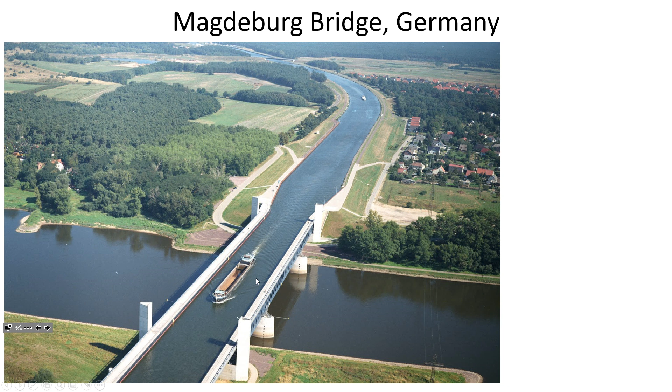But nevertheless, I thought it was a really good question to consider the proximity of residents to this and just kind of wonder, is there a risk there? And there's other risks there. It's not necessarily stormwater flooding risks, but the earth can always do unexpected things, and there could be spillage from there into it, but I don't think that flooding itself is going to be a problem. So that was a good question. I welcome thought-provoking questions like that.

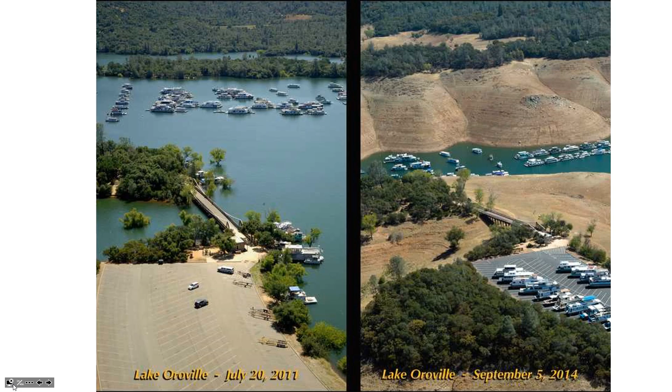But so I mentioned that reservoir is full now because of all the rain that they'd been receiving in Northern California. And I verified that that's true. Yeah, the reservoir is full, but I didn't realize quite the scale of it. It's really interesting how much that reservoir has filled up. Now this is a prior time that it went through that cycle of relatively wet conditions in 2011, which is about when I went and saw it, to a few years later.

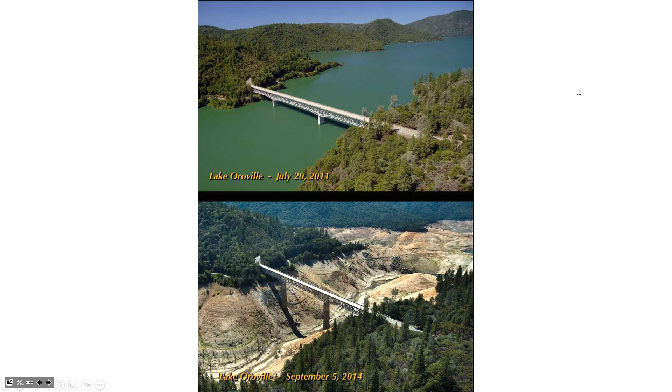If you look, the same basic location, here's the parking lot, here's this little floating bridge, and obviously the water levels are a lot lower in 2014, and they stayed low until recently. So just a couple of pictures that illustrates the difference between when this reservoir has water in it and when the water levels are relatively low.

Let me dim the lights so that it's easier to see these pictures, because there's a few interesting ones here. Try not to fall asleep with these lights down. I know it's just after lunch, but

Obviously when the reservoir doesn't have any water, it's not able to provide any hydropower benefits, and this reservoir does have a pretty significant hydropower generation capacity. But it is able to provide flood protection, which is another purpose of this reservoir. There are a lot of communities downstream that historically would have been threatened by wide fluctuations in the river levels, and so they can trap water and let it out at a more moderated flow rate and provide flood protection.

And so, when the water level is down like this, I guess if we're trying to be optimists, we could say, well, at least it's got plenty of flood protection available, because they could trap a lot of water when the levels are that low.

Now, consider this, just one more picture. As recently as the day after Christmas, the water level in the reservoir was 673 feet. That's the elevation of the water above sea level. That's not how deep the water was in the reservoir. That's just the water level was at 673 feet above sea level.

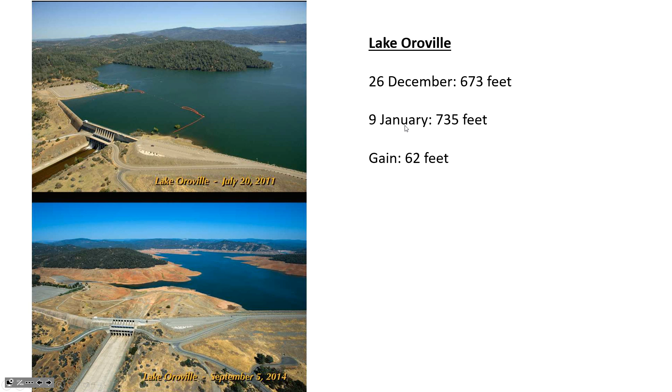And then January 9th, which was that Monday, 2 days ago, it was at 735. So just in a couple of weeks, the water level went up 62 feet. That's just incredible considering the surface area. We're not talking about a swimming pool that fills up quickly. We're talking about millions of acre feet of reservoir that went from almost empty to almost full. So that just kind of puts in perspective how rainy it's been in Northern California recently.

So this is the dam that is at the end of Oroville Lake. It's a really interesting dam because it's the tallest in the United States, but yet it's an earthen dam. And you'd think maybe for such a tall dam, 770 feet from top to bottom, maybe they'd need concrete, but apparently not. They can do a lot with just an earthen dam, and behind it is the second largest man-made lake in California, 3.5 million acre feet.

And that's maybe not a unit that you're familiar with, acre feet. It is what it sounds like. Acres is a unit of area. So if you had 1 foot of water that covered an area of an acre, that's 1 acre foot. So an acre is pretty big, right? This dam holds back a reservoir that has a capacity of 3.5 million acre feet. So it's a lot of water is the point.

Now, it's interesting. The water can get out of this reservoir 3 different ways. The water can go through the power plant, and 16,960 CFS can go through the power plant at any given time. There is a river bypass that allows for fish migration, and that's a relatively lower flow rate, 5,400 CFS.

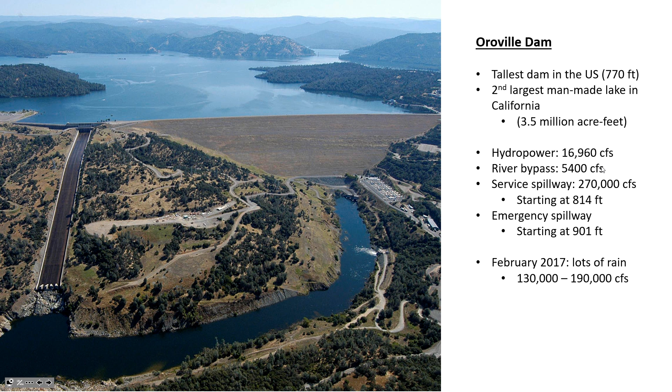So obviously, if that much is coming in, either the water level is rising or they're having to send water down the service spillway, because the hydropower and the river bypass combined isn't going to be able to discharge this much water. So that's exactly what happened. There was so much water coming in, the reservoir filled very quickly, they're sending as much as they can through the hydropower and river bypass, and so now water has to go down the spillway. So what could happen, right?

Well, ordinarily, water goes down that spillway at quite a high velocity. 700 plus feet is the vertical distance that the water has to spill off. There's a lot of energy that gets picked up by water as it's accelerating down the face of a concrete spillway. They've got these big weirs at the end of the spillway to dissipate energy, to take the impact and the brunt of the water so it doesn't totally scour the river downstream.

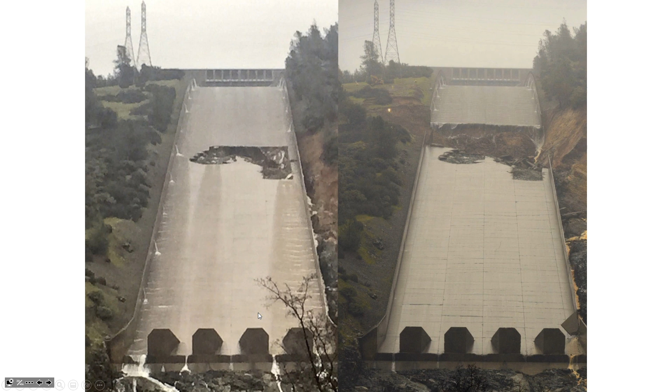And what they noticed was there was a little bit of a problem, that a variety of factors caused a crack in the concrete. The factors are that, number one, they didn't inspect it probably as often as they should. Number two, it was a bit old to begin with. There were probably some construction problems. The rock underneath is weak.

And so this event happens where they're having to send a lot of water down the spillway. A hole forms, so they turn off the water briefly just to get in there and have a look. But they can't turn the spillway off for very long because the water level's rising. There's still water coming into the reservoir. They can't stop that. So they have to turn the spillway back on again. The hole gets bigger.

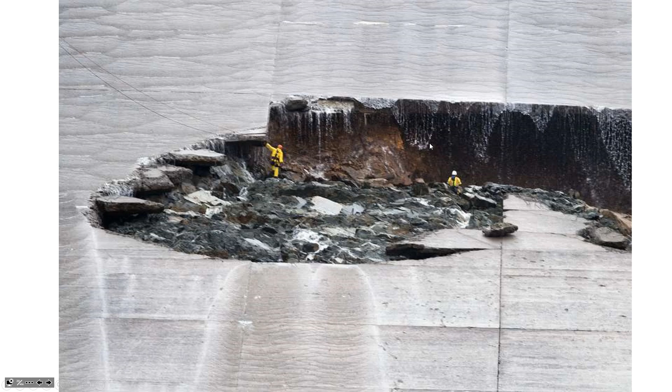And just to give you an idea of how big that hole was, you can see for perspective here, it got up to 300 feet in diameter during one of the periods where they turned off the water and sent people down to have a look. So 300 feet, that's a big hole in the spillway.

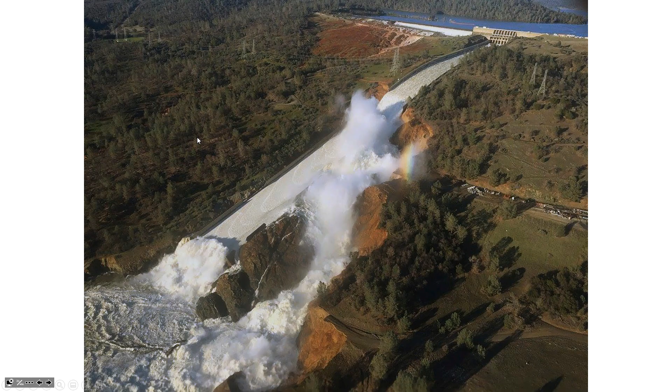And you can see that, compared to the size of the hole, the thickness of the concrete just seems wafer thin, very thin concrete. I'm sure at the time it seemed adequate, but what happened was the condition continued to deteriorate, and water was flowing down the side, and that's bad because it was headed in the direction of the dam, all this scour.

So people were wondering, is this dam going to be threatened? If this whole hillside erodes and collapses, is the dam going to be stable? And they thought probably the dam will be stable. But probably isn't good enough when you've got 180,000 people living downstream of the dam.

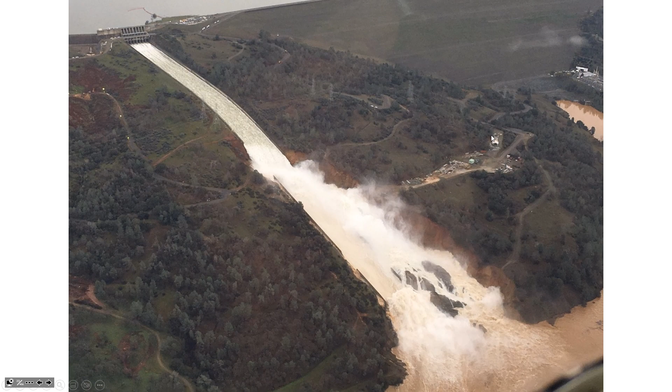And so they evacuated 180,000 people, in part because maybe this hillside will fail, but the other issue was that the spillway couldn't handle as much flow as they wanted. They turned the flow down a bit out of the spillway, still sending some water, but they knew if they turned it all on, it was going to cause irreparable damage.

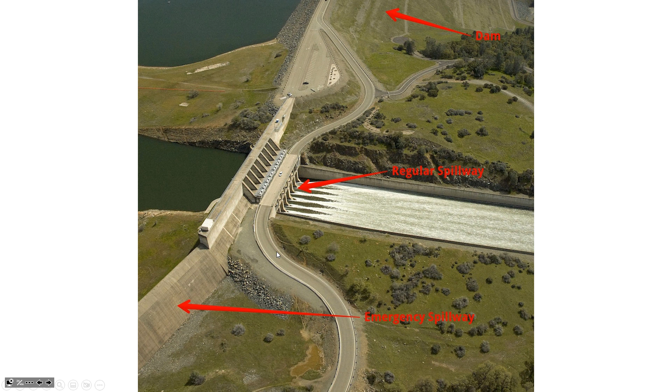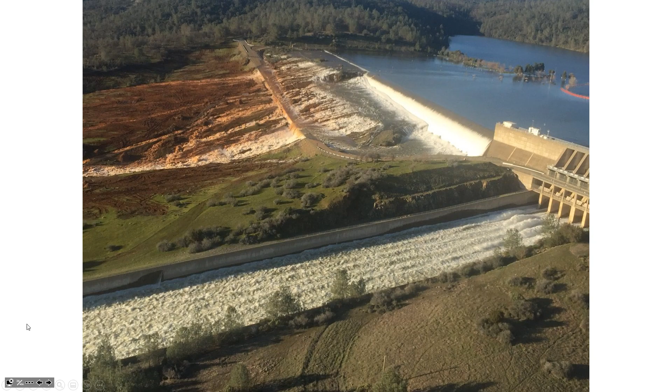So they turned down the flow to the spillway a little bit, and they're sending water over the emergency spillway, which had never been used before. First time in the history of this dam that the emergency spillway had water go down the front of it. And the hillside is not concrete, it's just vegetation and soil. And so you can see the scale of the destruction.

They had a few hours notice, so they sent guys with chainsaws onto that hillside to cut down trees as quick as possible, because they knew the water would do it, and then those trees would go downstream and clog things up. So they tried as much as possible to clear the area of debris and obstacles. But you can tell from the color of the water, a deep, rich, dark brown, that it's taking a lot of sediment with it.

So they turned on this emergency spillway. There's still water going down the service spillway. The water levels are continuing to rise, and the toe of this emergency spillway starts to scour and erode. And so they're thinking, if there's a total uncontrolled release of water from the reservoir, then those 180,000 people downstream are in real trouble.

So ultimately, they evacuated them because they were worried about the emergency spillway completely dematerializing and all of the flow coming out of the reservoir in a catastrophic and unregulated way. So Oroville Dam has a real sordid history. They have repaired it since this 2017 event, but this gives you an idea of the path the water was taking through the emergency spillway as it worked its way downstream.

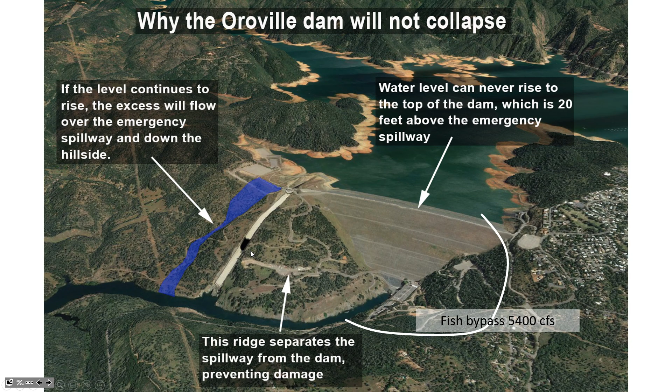And here you can see the size and scope of that hole. This is vertical exaggeration, so you can sense the path the water was taking and how it was guided by the contours of the land. There was a pretty substantial hillside between the spillway and the dam, but they didn't want to take chances because so many unexpected things had happened already, so they displaced those 180,000 people.

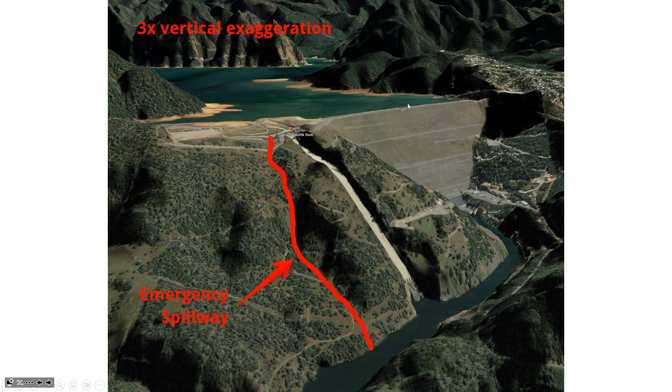So you can see here, looking downstream, the emergency spillway water making its way into the river, and all that sediment turns out not so good for the environment. Really tough for fish and other aquatic species to recover from that much soil getting into a river. It interferes with habitat. Big quantities of sand settle out of suspension at slow parts of the river, so now they've got gigantic sandbars and sediment in places it wasn't previously.

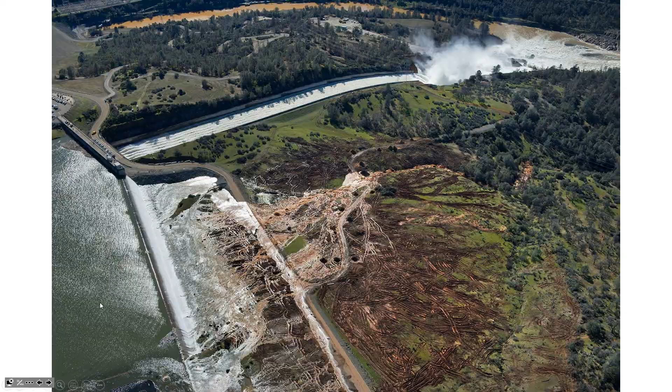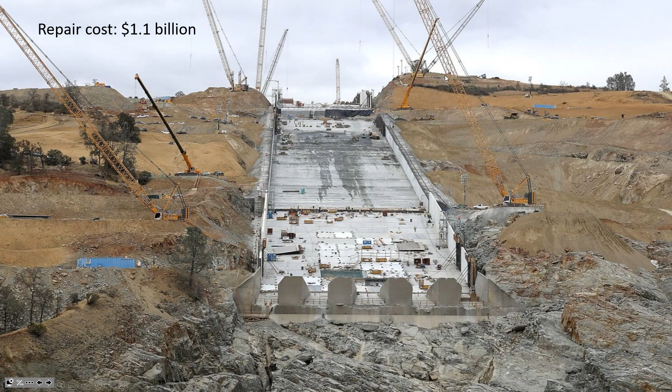So the area was pretty devastated after the fact. You can see that most of the spillway was damaged, and a lot of the rock to the side of the spillway was damaged. You may wonder, how much does it cost to recover from something like that? $1.1 billion, it turns out. $1.1 billion.

And the thing that's a little hard to swallow is that this whole incident wasn't a real surprise. Back in 2005, when this dam was getting its license renewed, environmental groups had objected to the renewal, saying a previous engineering study had identified too much risk. There was a study in 2002 that said the emergency spillway area will be damaged if there is overflow, and it'll cause all these environmental destruction effects downstream.

And so it was kind of known. They didn't know that the main service spillway was going to crack, but the report from 2002 did say if this emergency spillway is ever used, it's going to be a real problem. And so they said, let's not relicense this dam until they put concrete cladding on the emergency spillway flow path. And ultimately, the dam operator didn't have to do that because the cost was going to be too expensive. It would have been $100 million to put concrete on the side of the emergency spillway.

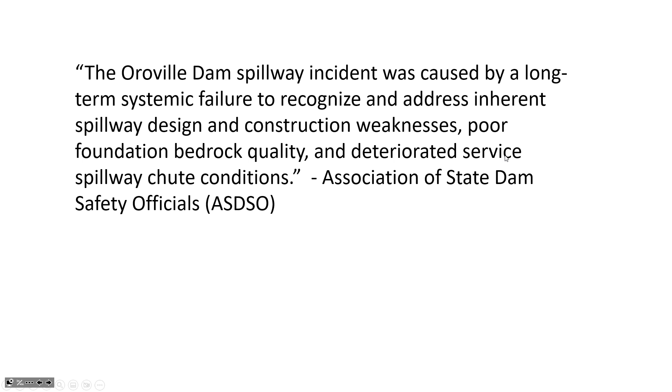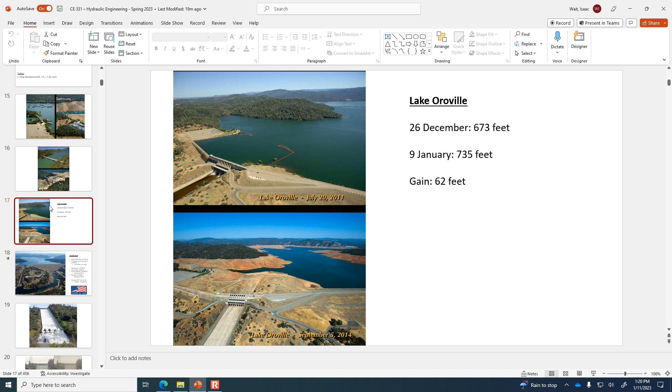So I think it'll be interesting to see. The last time they had real wet weather and the water levels suddenly rose in Oroville was 2017, and then recently the water levels rose really quickly at Oroville. Hopefully they've sorted it all out, but you never know. What can that handle? How high can it go? 901 feet is when flow starts going over the emergency spillway. And so in theory, it shouldn't get but a couple of feet higher than that.

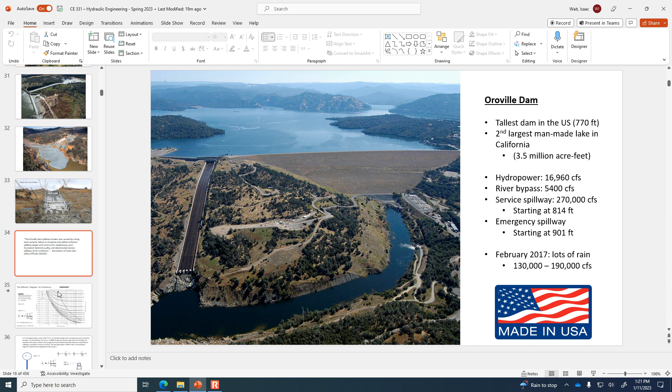Have you shown this before? Like, did you show it in economy? I don't know. Not sure. I remember seeing this. I don't remember if you showed us or Dr. Nas showed us. Yeah. Bad situation, right? Yeah. All right.

Let's do some calculations. Where we left off on Monday was talking about the Moody diagram. So I have a handout for you. This example says that the flow is going 30 meters per minute through a 0.25 meter diameter pipe, and K sub S is the equivalent sand roughness. That's expressing the roughness of the pipe material with an equivalent diameter grain of sand, so it's a cast iron pipe, but it's equivalent roughness to a sand that has a diameter of 0.26 millimeters.

So let's go through the process of determining what is the F value that should be used in a situation like this. Did everybody get a copy of that handout? And were there any extras? Thank you. Okay, so first things first, the flow velocity, V, is 30 meters per minute, and so that is 0.5 meters per second.

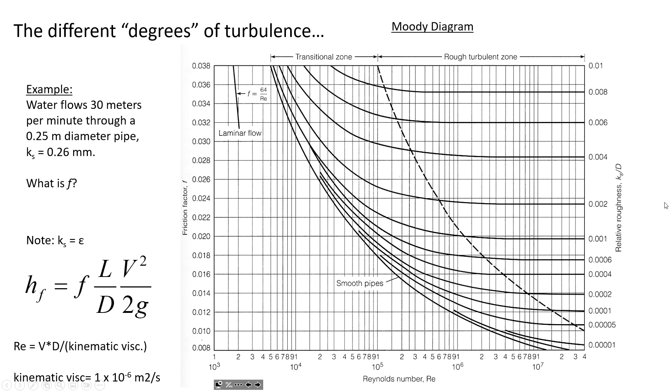So you're given a diameter, you're given the equivalent roughness, and so that defines for you where things start on the right-hand side of the Moody diagram. So what you're going to do here is determine what is the F value, using the same thing that we just did in this example. Find the F value, and then the whole point of determining the F value is that you put it into the Darcy-Weisbach equation. So this formula tells you how much energy loss there is.

And does anybody remember seeing this energy equation back in fluid mechanics? It's similar to the Bernoulli equation, but distinct because you're accounting for friction losses. So this H sub F on the right-hand side of the equation suggests that water is flowing from 1 towards 2. There's a directionality. Water is flowing from this reservoir. So location 1, just for instance, maybe, is here at the top of the water in the reservoir. This would be location 1.

And then location 2 would be at the top of this building, which we know the elevation is 100 feet. And we know that we want the pressure at location 2 to be 30 psi. So you know P2, you know Z2, velocity. You can neglect the velocity head at location 2. But you're just going to find out how high does the water need to be in that tank to overcome the pipe friction and provide the required pressure at 2.

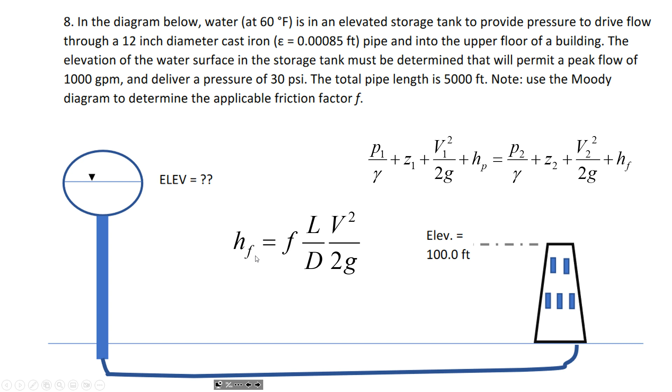So this is just a direct application of the example where we're taking the F value that you find from the Moody diagram and then putting it into the Darcy-Weisbach equation. Those are hints that I think will help you out as you actually start working the problem.

Okay, so consider water that's flowing through a pipe. If we were going to do a force balance on water inside of a pipe, if we just consider some element of water in the pipe, the water is on both sides of this element, but we're just drawing control surfaces around a pipe, and we're going to consider what forces are acting on some of the water in the pipe. So if we just take an isolated segment of water, there's going to be pressure in the pipe on the other side of that water.

So here, if the water is flowing from 1 towards 2, there's going to be the pressure on the left side of it that's pushing in the same direction of its movement. There's the pressure on this downstream end that's resisting its movement by virtue of the fact that we've put our control surfaces and external forces are going in the opposite direction. There's the weight of the water acting downward. And then shear stress times perimeter times the length is the integrated effect of the resistance due to pipe friction.

So shear stress times P, perimeter would be the circumference around that circular pipe, and then length would be the distance between 1 and 2. So we're just saying if you consider the entire pipe surface area that water is in contact with, and multiply it by some shear stress, then that is the force that's being applied in the opposite direction of the water's movement. So the water's moving to the right, the shear force pushes to the left.

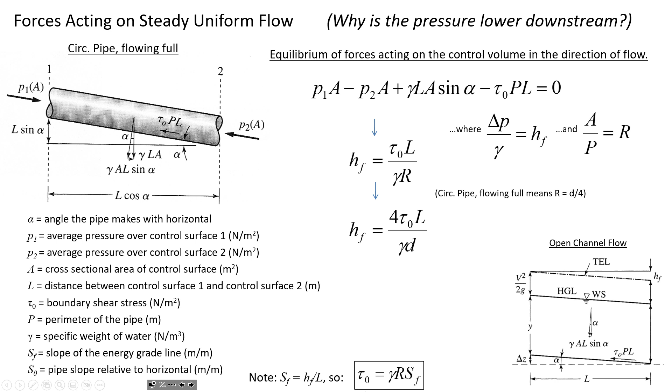But for now, we'll focus on some formulas that predict the effect of shear stress. We don't calculate the shear stress directly very often. Most of the time, we're going to be looking at the effect of the shear stress. Like, why is there pressure loss when water's flowing through a pipe? Why do we have to put in a pump to get the water from the treatment plant to this building? The treatment plant is only about a mile upstream along the Ohio River, but we have to have booster pumps to overcome the effect of pipe friction and get the water here. And so there are different formulas for quantifying that head loss effect.

So let's just play around with the numbers related to this shear stress calculation. Let's say that we have an inclined pipe, where the water is flowing from 1 to 2, but the pipe is going uphill. The interesting thing is that the energy grade line decreases in the direction of flow independent of the pipe's orientation. It doesn't matter if the pipe is horizontal, going downhill, or going uphill. As long as the water is flowing from 1 towards 2, the energy grade line is going to be going down in relation to the energy that's lost due to pipe friction. Okay, so let's calculate the slope of the energy grade line and then the pressure change over 100 meters of pipe.

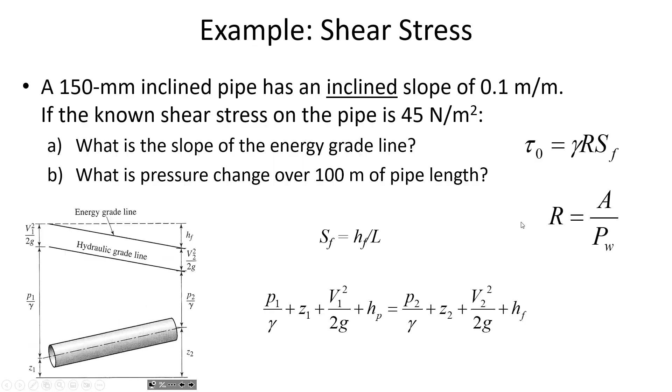So we've got the formula for shear stress, the formula for hydraulic radius, and so on. Just because we've only got about 10 minutes left in class, rather than giving you time to work these calculations, which would be my preference, I think what I'm going to do is just bring up the solution and we'll look at it together, so you can get a feeling for what these calculations look like. Let me see if I've got these examples at the ready.

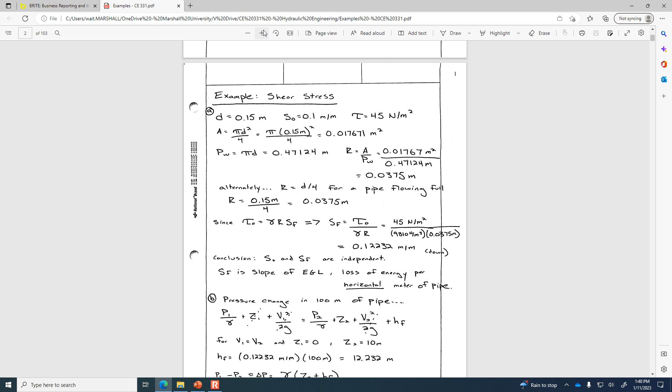All right. So what we want to do in this example is find S sub F, the slope of the energy grade line. And we know the shear stress is 45, so shear stress is known. Since it's water, what's the unit weight of water in SI units? 9810 newtons per cubic meter. Good. Hydraulic radius, R. Well, that depends on the fact that it's a 150 millimeter diameter pipe.

So the first thing I do in these calculations is calculate the hydraulic radius. I did it the long way. I could have just done d divided by 4, but I did it the hard way just to prove to myself that it works. So if you've got the area of a 0.15 meter pipe divided by the wetted perimeter, we get the hydraulic radius 0.0375 meters. Turns out that's the same if you just do diameter divided by 4, 0.0375 meters. So we know hydraulic radius.

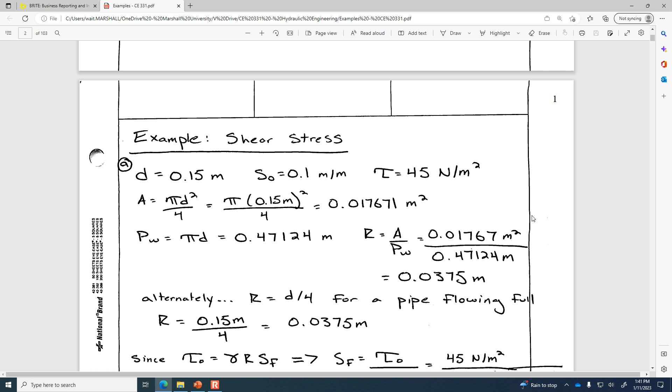We know that gamma is 9810. We know that the shear stress is 45 newtons per meter squared. So just substituting that into the formula, I rearranged the formula to solve for S sub F. Here's the thrilling conclusion, that the slope of the energy grade line is 0.12232 meters per meter. So that's vertical per horizontal. For every meter of distance in the horizontal direction, you're going to lose 0.12 meters of energy vertically. So that's the slope of the energy grade line.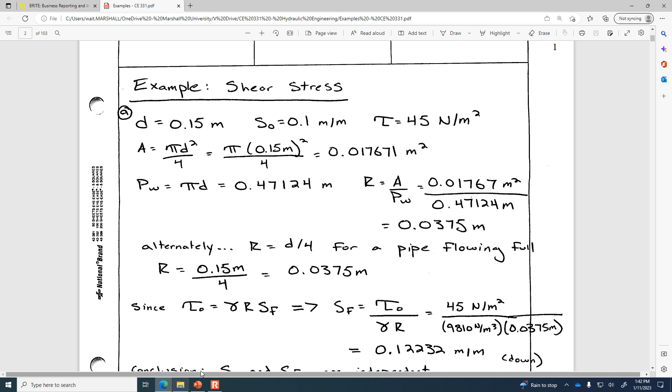So the thing that's interesting is that the slope of the energy grade line is independent of the pipe slope if it's an enclosed pipe. The same isn't true in open channel flow. If you've got a river, the slope of the energy grade line is going to be the same as the channel slope if it's steady, uniform flow. But in closed pipe flow like this, you can have the pipe going uphill and the energy grade line going downhill, and we've just seen this example that confirms it. So that was the first part of the example. Any questions on these first calculations?

I see a number of 3-ring binders today. That's good. Some of you have already printed out the notes. That's good. I haven't yet got together the description of what you should have as far as the binder, but we'll talk about that next week, this 2% of your final grade that goes for the binder.

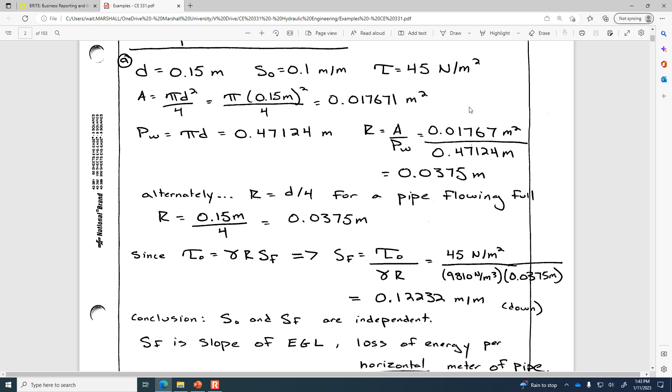Okay, so the next part of the example was, what is the pressure change over 100 meters of pipe? We know S sub F is 0.122. 100 meters is the length, so we can calculate H sub F. And then with H sub F in the energy equation, we'll be able to calculate the difference between P1 and P2. So that's the overhead view of what we're doing in part B. We know S sub F, so let's use that to find H sub F, and then substitute it into the energy equation. Of course, there's no pump, so the H sub P term will cancel out.

And if we're talking about location 1 and location 2, and the diameter of the pipe is the same, how will the velocity of the water change? Assuming that this is an incompressible fluid and the diameter is the same, what's the difference in velocity between 1 and 2? I see someone shaking their head in the negative. You're right. There's no difference. Yeah, the velocity will stay the same. If you've got an incompressible fluid, the velocity can't change if the diameter is the same. So V1 and V2 are equal, so they're going to drop out of this formula. It'll simplify. So let's look at the calculations.

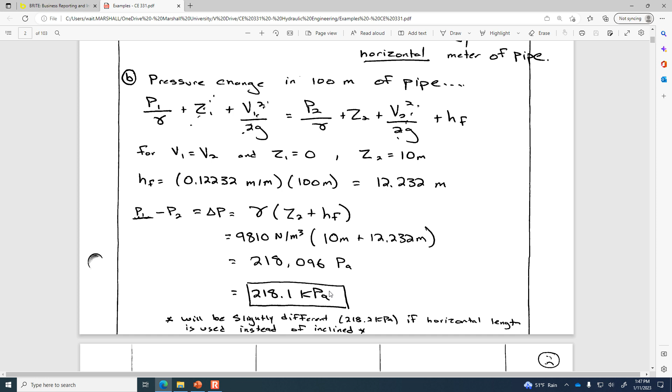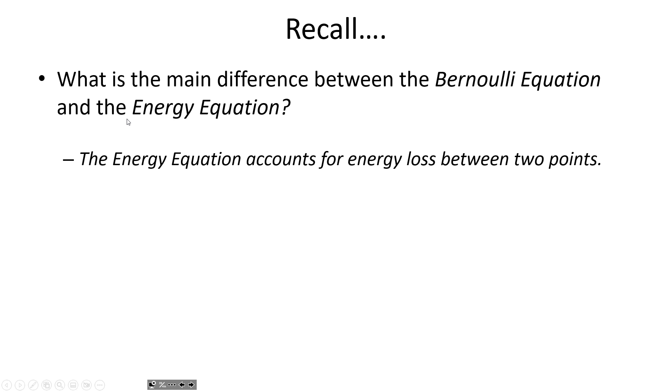Okay, so Bernoulli's equation versus energy equation. I already alluded to this earlier, that the energy equation is similar in appearance to the Bernoulli equation, but it accounts for head loss due to pipe friction. So Bernoulli's equation would say that if the velocity decreases in a pipe transition, the pressure should increase. That will still happen in the energy equation, but the energy equation also accounts for the effect of energy loss due to pipe friction.

So if there was a pipe like this where the diameter was the same, Bernoulli's equation would say there's no change in pressure, but we can observe that change of pressure in the real world. We know it happens. And so the energy equation is what we need to account for the energy loss due to pipe friction. So the change in pressure for a horizontal pipe is because the pipe is resisting the movement of the water due to the no-slip condition.

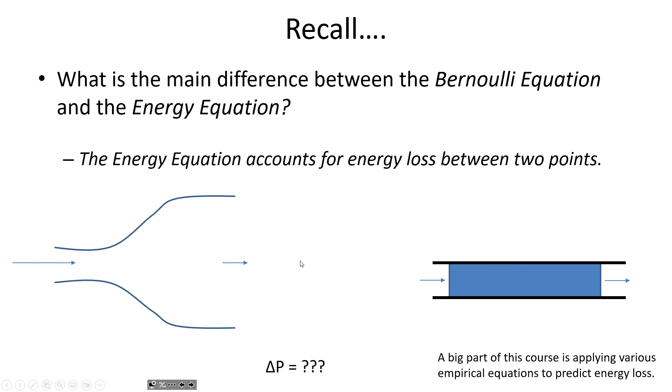So all the different equations that we're going to be going through to learn different ways to estimate that effect of the energy loss due to pipe friction, we'll spend the first couple of weeks just talking about estimating the effect of energy loss due to pipe friction.

You may recall talking about piezometers in fluid mechanics. These are the simplest device that you can have for measuring pressure in a pipe. If you just puncture a pipe and water starts spraying out from the hole, but then you put a tube into that hole, water is going to rise up in the tube to a level that reflects the pressure in the pipe. So the water level just rises to come into equilibrium with the pressure in that pipe. That's a piezometer. And if you had two piezometers in a pipeline, you'll notice that as water flows from one to the other, the water level is lower downstream due to pipe friction.

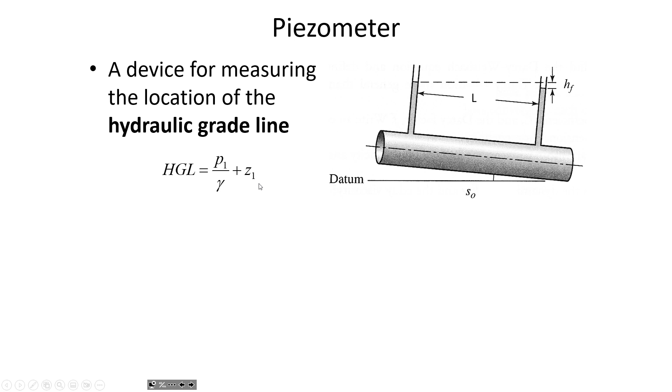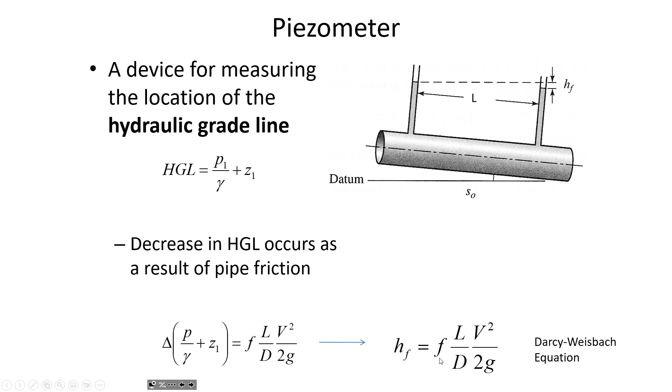So the hydraulic grade line is the combination of the pressure head and the elevation head, whereas the energy grade line also accounts for the velocity head. So just looking at this change of hydraulic grade line, when you take into account the energy loss due to pipe friction, there has to be some proportionality factor, F. And that's the F value that we got from the Moody diagram today.